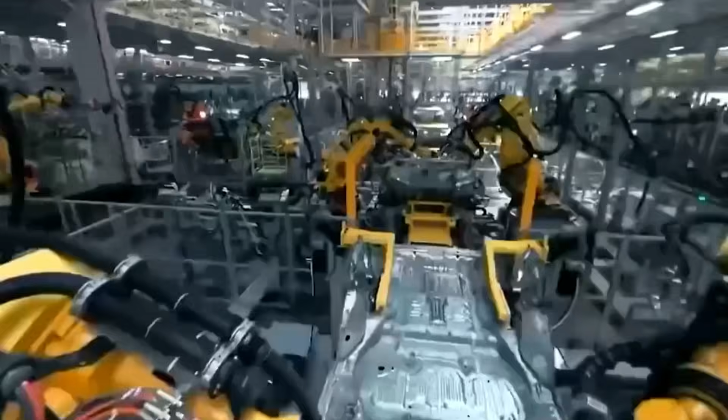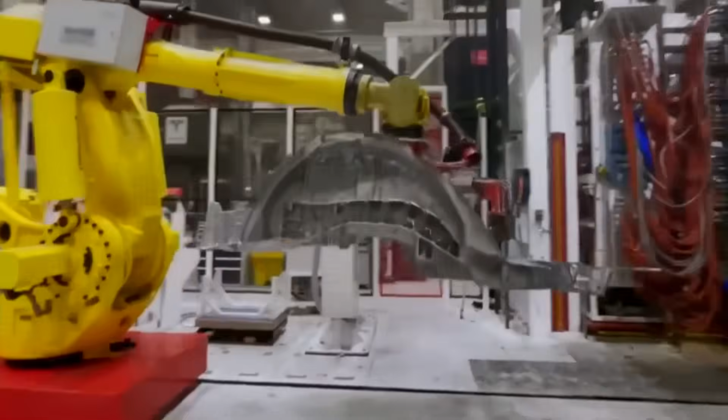When automotive engineers first heard about Tesla's plans, many of them simply dismissed them. One press instead of hundreds of welded components? Impossible. But whilst competitors were shaking their heads in skepticism, Tesla was quietly rewriting the rules of automotive manufacturing, and by the time the industry realized it, there was almost no one left to catch up with.

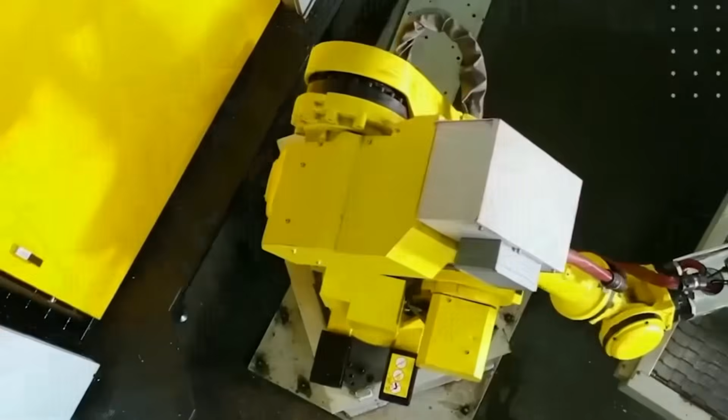And now the company is preparing to take its next step, one so radical that even those who had already accepted the Giga press as the new norm found themselves caught off guard once again. By the end of 2025, Tesla's production line in Fremont was operating with more than 1,000 robotic arms for welding, painting, and assembly. A high-tech factory in every sense of the word, or so it seemed.

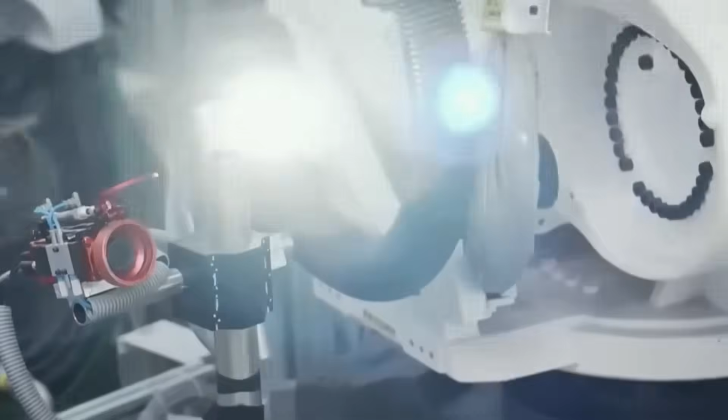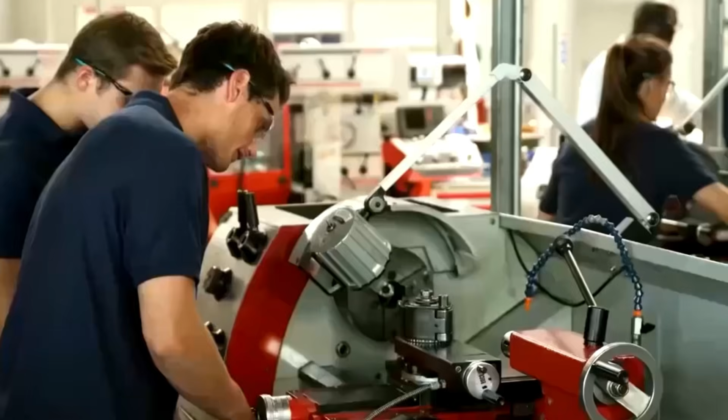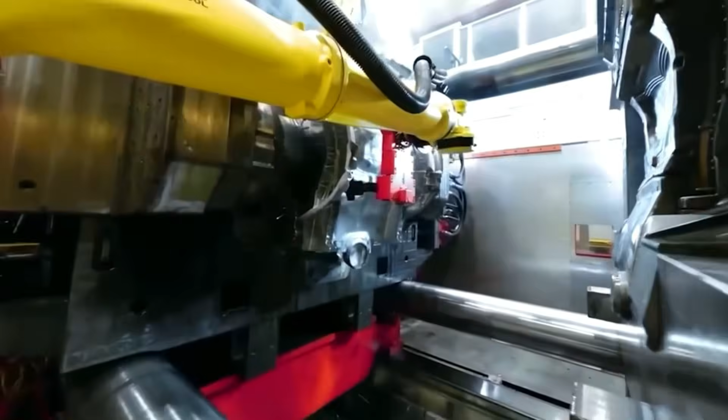But in early 2026, Tesla removed half of those robots from the line, not because production had been scaled back, but because something fundamentally different had taken their place. Elon Musk said it plainly: Tesla now has a vehicle manufacturing system unlike anything else in the world. And at the heart of that system is the fourth-generation Giga press, a machine that Musk had spent years developing specifically for new models, including the Cybercab robotaxi, a machine with the greatest casting capacity ever created, operating at a speed more reminiscent of consumer electronics assembly than a traditional automotive plant.

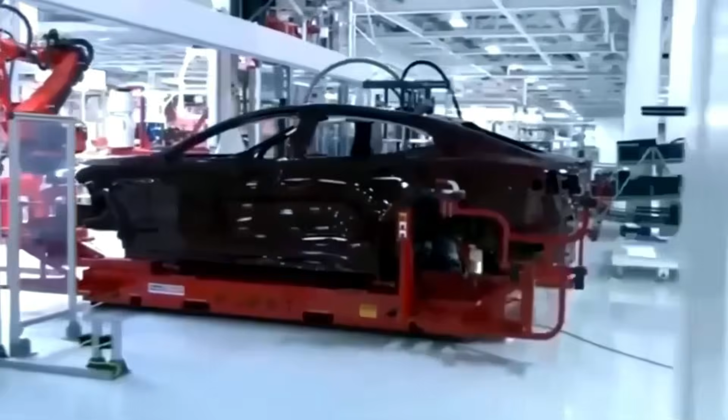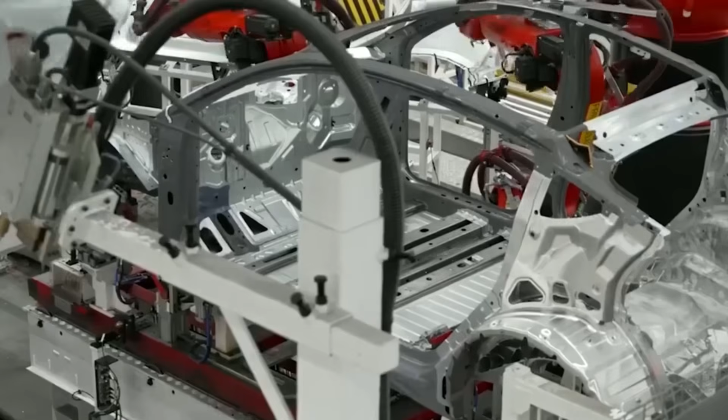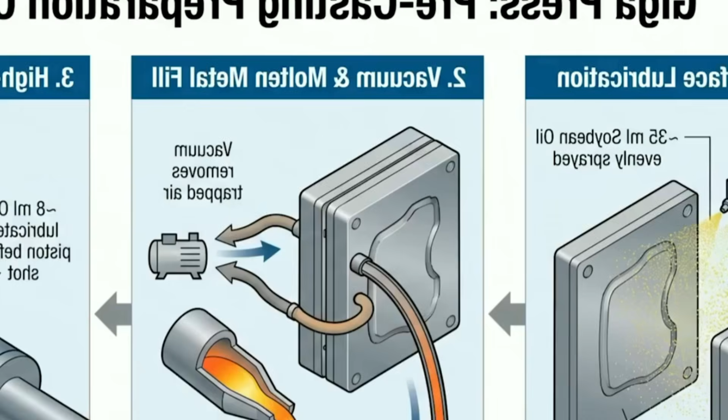But a reasonable question arises here. Why do you need an even larger press when the new vehicles are compact? What's the logic? To understand that, you need to go back to the very beginning. The story of the Giga press has its roots in the development of the Model Y. Tesla had an idea: remove hundreds of welded components and replace them with a single massive aluminum casting. The problem was that a machine capable of doing this simply didn't exist.

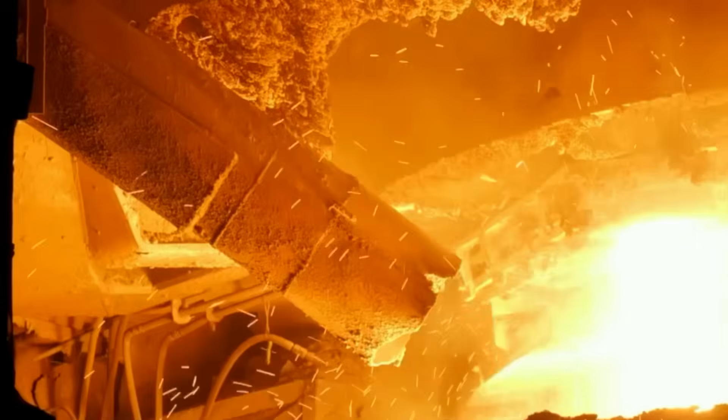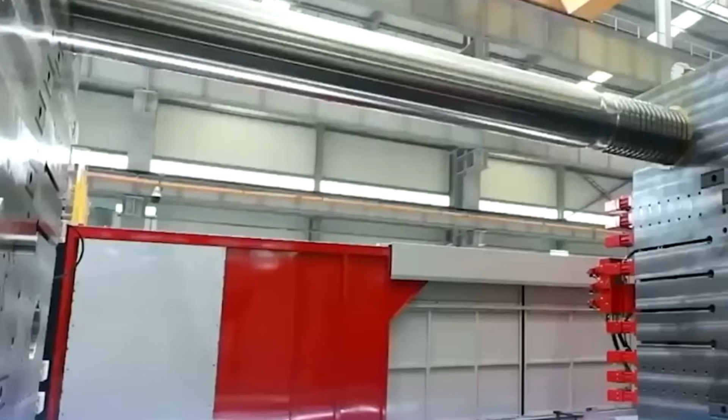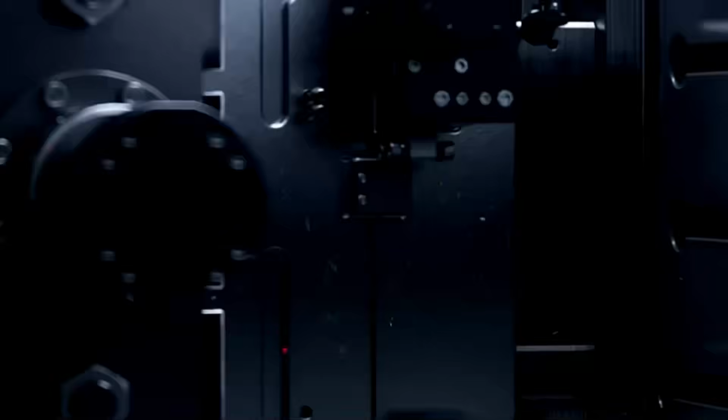Musk approached leading manufacturers of casting equipment from around the world. No one could offer what was needed. No one except an Italian manufacturer by the name of Idra, which at that moment happened to be finishing development of a giant high-pressure press. The timing of that coincidence proved decisive. And so the Giga press was born, the machine that today produces the largest structural components for models such as the Model Y and the Cybertruck.

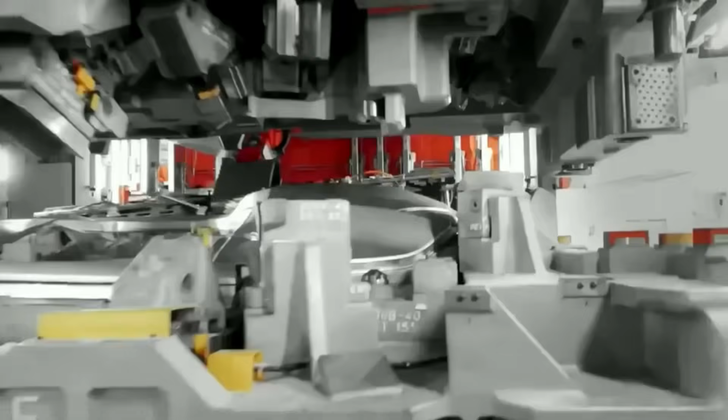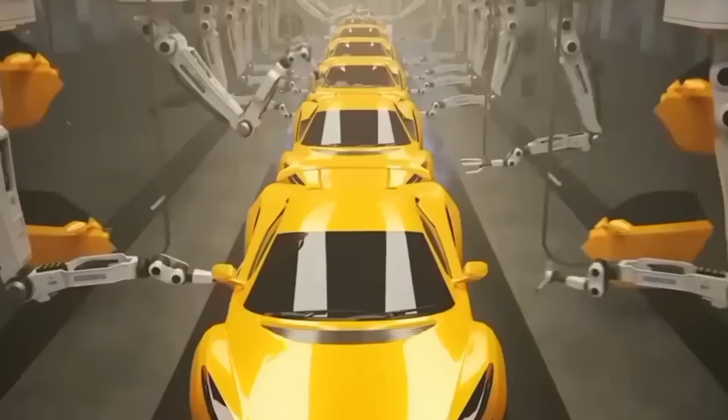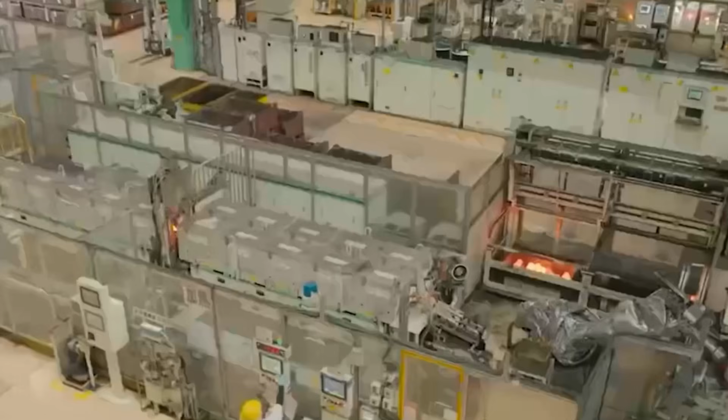The process works as follows. An aluminum alloy is melted in an enormous furnace at extremely high temperatures. The liquid metal is then injected under colossal pressure into a steel die that reproduces the exact geometry of the part. The pressure forces the molten metal into every microscopic corner of the die, eliminating voids, weak spots, and defects. Once the die is filled, cooling begins. And this is where the entire technological significance lies.

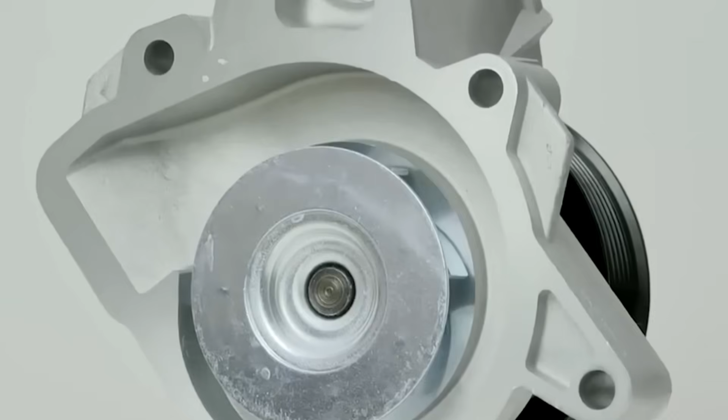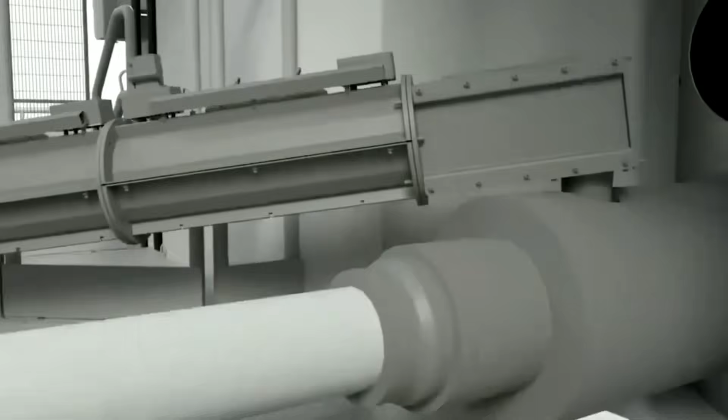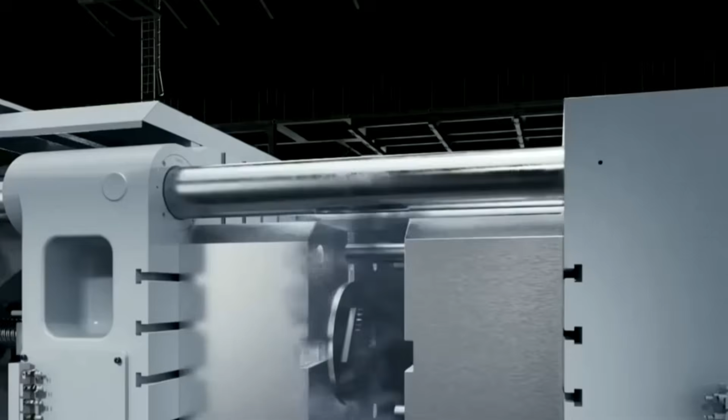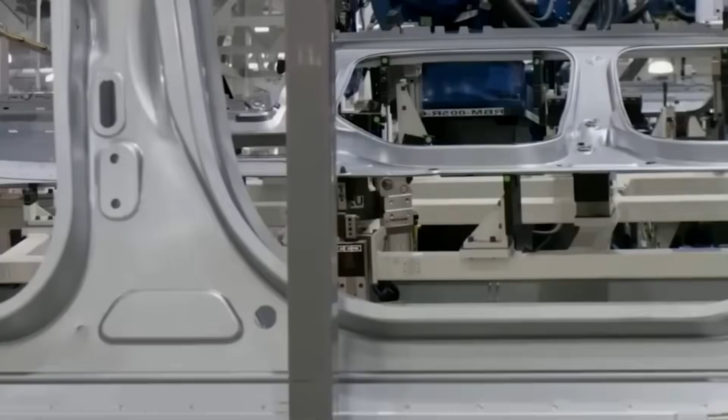If the metal is injected too quickly, air bubbles form inside and weaken the part. Too slowly, and the aluminum begins to solidify before it has fully filled the die, and the casting is scrapped. The cooling system is therefore designed to maintain a uniform temperature throughout the entire process. Once casting is complete, robotic systems extract the part, trim the excess metal, and send the component on for quality control. The result is not simply faster production. By replacing dozens of welded elements with a single casting, the Giga press makes the vehicle lighter, stronger, and more rigid, while simultaneously reducing production time, assembly complexity, and the need for manual labor.

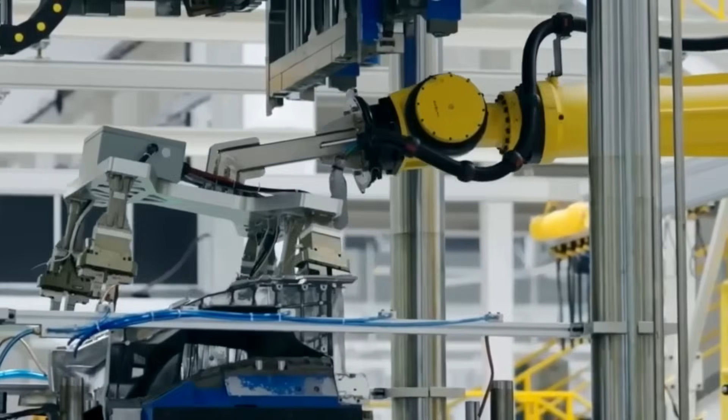Today, Giga casting is no longer exclusive to Tesla. General Motors, Hyundai, Volvo, and Chinese manufacturers are investing billions in their own casting systems. One Chinese manufacturer has already invested in a machine with a capacity of 16,000 tons. But whilst everyone else is trying to catch up with Tesla, the company is preparing to leap so far ahead that the entire industry may be forced to reconsider its very notion of what is possible. Musk's next target is a 50,000-ton Giga press.

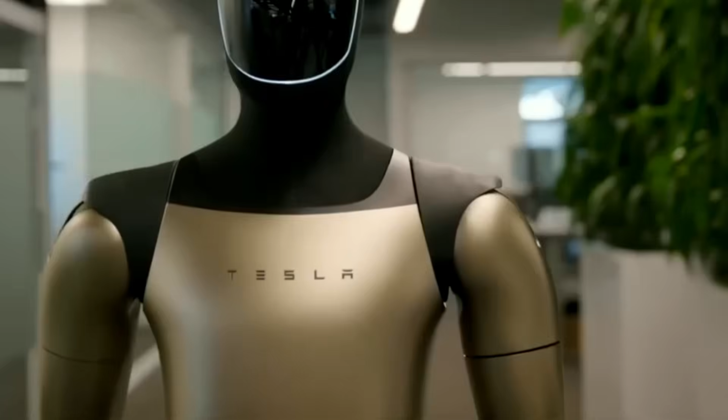When he first mentioned that figure, the initial reaction was predictable. How could a machine of that size even exist? Where would it be housed? How long would installation take? And most importantly, how can a single press simultaneously produce structural components for 5 different vehicles at once? According to Musk, that is precisely the point. Once the 50,000-ton press is up and running, the factory will move at a speed that a human being physically cannot track.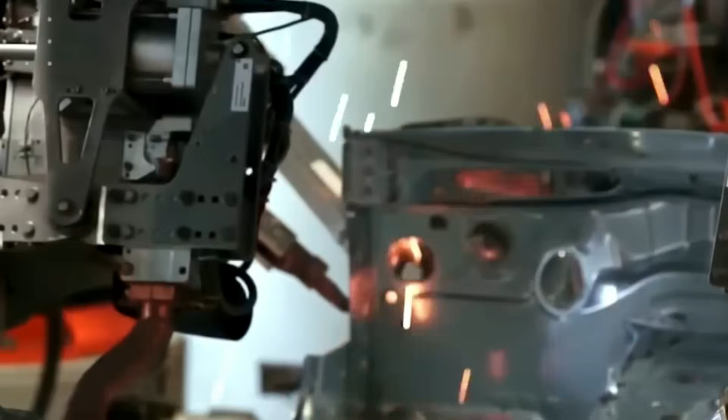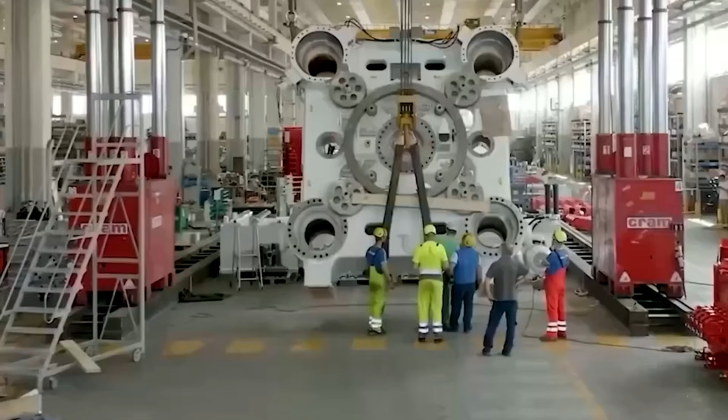Every stage, injecting the molten aluminum, cooling the die, extracting the finished casting, will be carried out in a fully automated mode without interruption. A single production cycle will take around 5 seconds. An entire vehicle frame in the time it takes you to blink a few times. Musk described it this way: the line will move so quickly that people will physically be unable to approach it. This is not a car factory in the conventional sense.

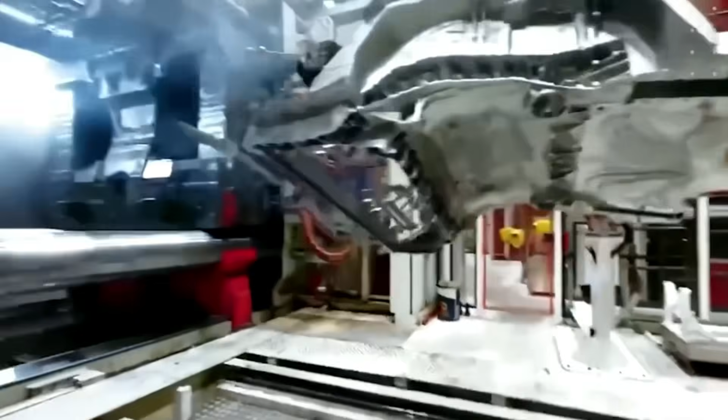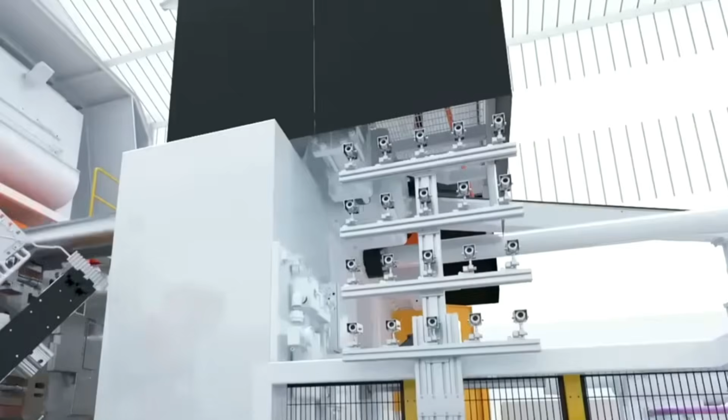This is consumer electronics manufacturing, only instead of smartphones, vehicle frames come off the line. The fundamental principle of the 50,000-ton press is similar to previous versions. The difference lies in the scale and precision of every step.

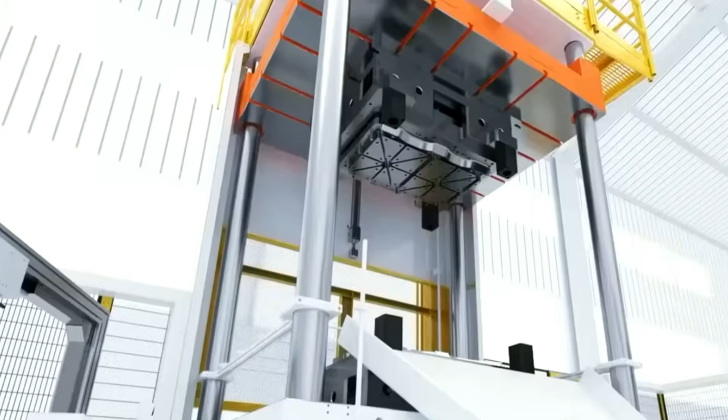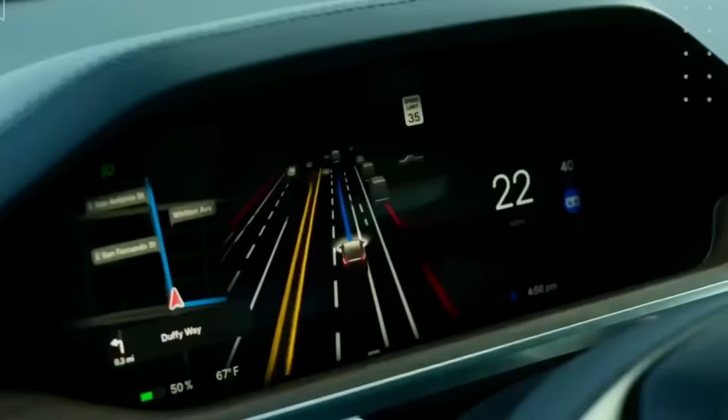Aluminium, both primary and recycled from previous castings, is loaded into the furnace and melted at approximately 850 degrees Celsius. After surface impurities have been removed, the liquid metal travels through heated pipelines to a second sealed holding furnace, where it is maintained between 750 and 850 degrees, always ready for the next cycle.

The space inside the holding furnace is filled with nitrogen. This prevents the molten aluminum from reacting with oxygen and forming unwanted oxides. For additional purification, argon, a rotary degasser, and a silicon carbide filter are used to remove dissolved gases and particles larger than 25 microns. Only after all of this is the metal considered ready.

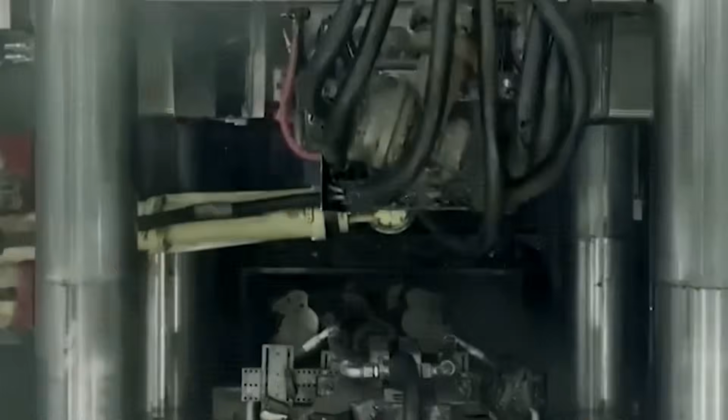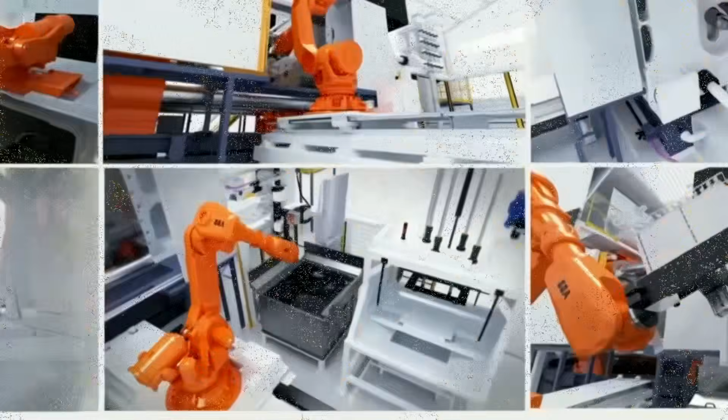Before each casting cycle, the die is coated with a thin layer of lubricant. A robotic arm applies approximately 35 milliliters of soya oil evenly across the entire surface, so that the finished part releases cleanly. A vacuum is then created to remove air, after which the molten aluminum enters the injection chamber.

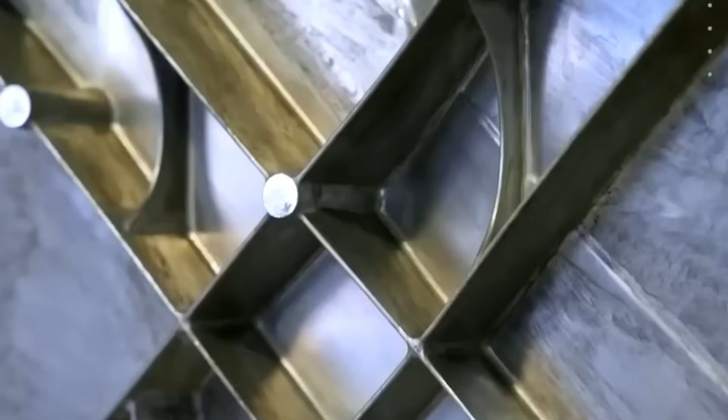A plunger, lubricated with approximately 8 milliliters of oil before each shot, drives the metal into the die cavity with enormous force. After injection, the metal solidifies inside the die, and the red-hot casting is extracted at a temperature of around 400 degrees Celsius. It is immediately submerged in a cooling bath, where the temperature drops to approximately 50 degrees.

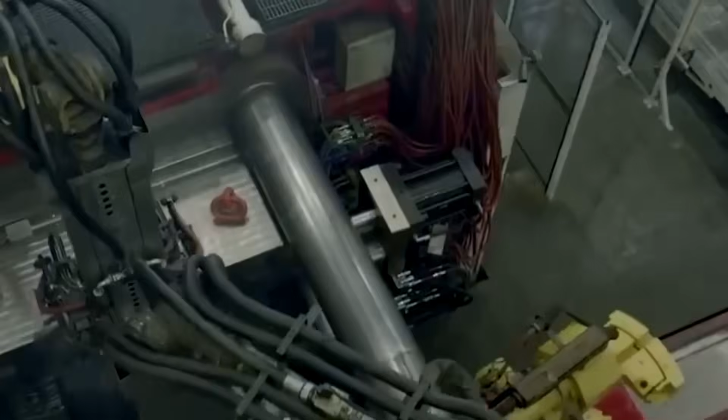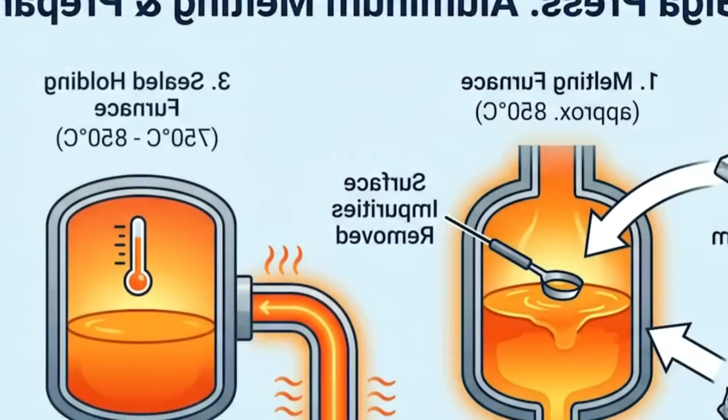This is not simply about speeding up the process. Rapid cooling eliminates a number of casting defects and improves the mechanical properties of the material. The die, meanwhile, cools to approximately 185 degrees, after which a robotic system cleans every surface. The next cycle can begin within just 1 to 2 minutes. Excess aluminum is sent back to the melting furnace. Every finished casting undergoes X-ray inspection to verify its internal structure.

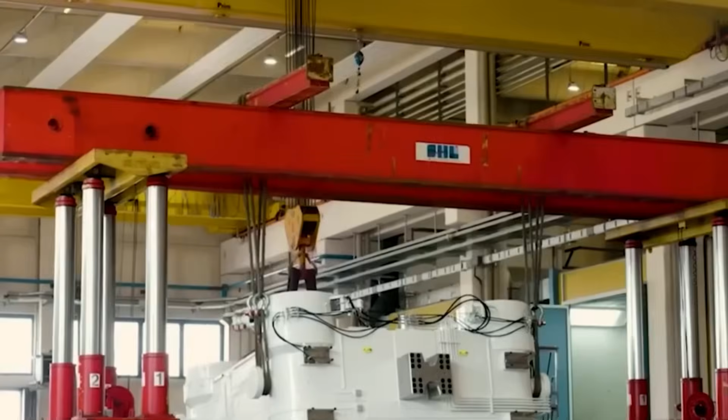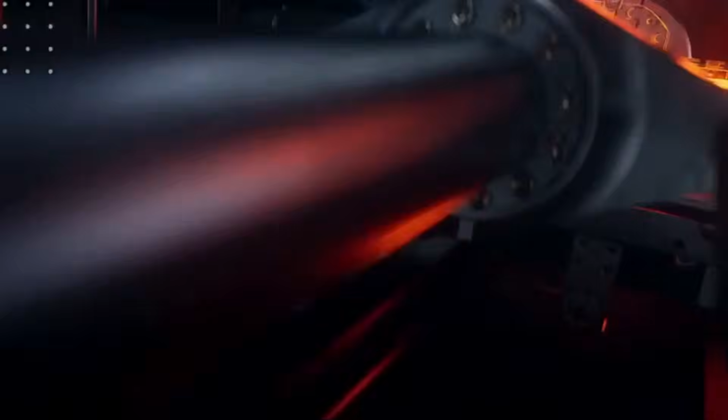Achieving this kind of speed is not simply a matter of building a larger machine. Tesla has developed an ultra-rapid cooling system, an intelligent die release mechanism, and an AI-based quality control system capable of inspecting every casting in real time. This combination of technologies has never previously existed in the automotive industry.

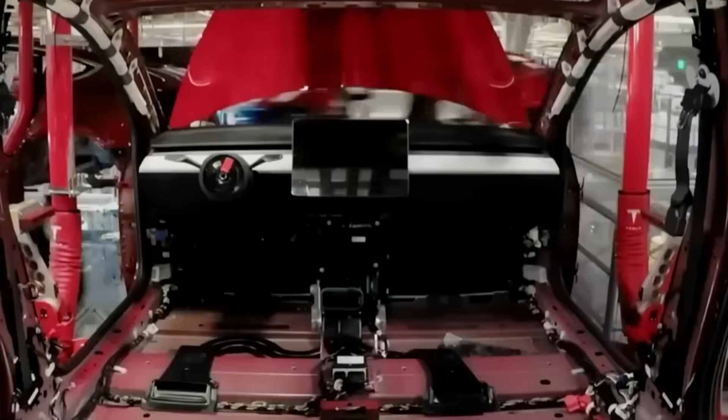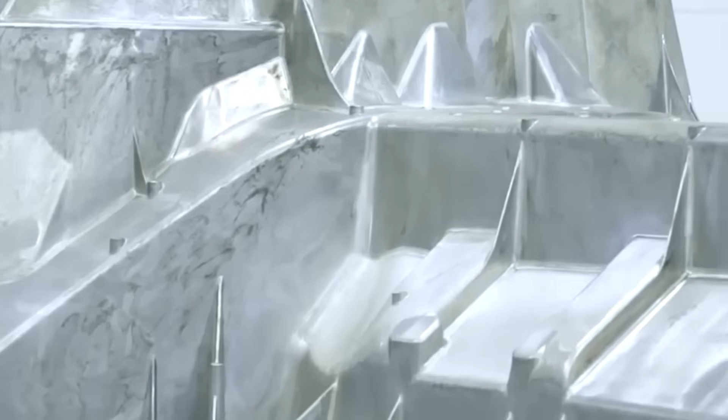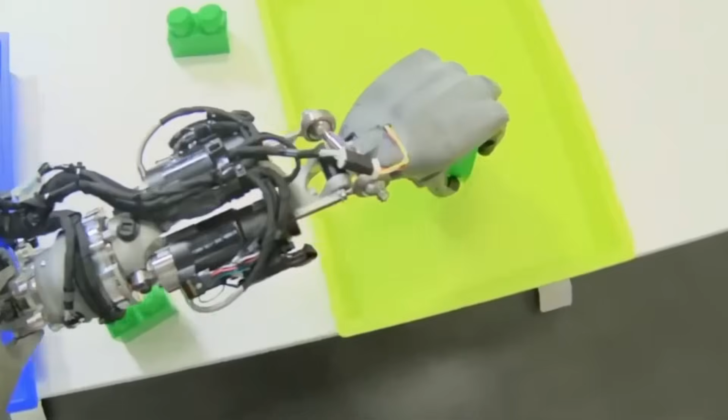A telling example: whilst the Model Y had around 200 major structural components, the Cybercab has approximately 80. This is not an evolution of manufacturing, it is a complete redesign from the ground up. For more than a century, vehicles were assembled from hundreds of individual parts joined by welds, bolts, brackets, and rivets. Each such joint is a potential point of metal fatigue or long-term wear. Tesla is moving in the opposite direction. A significant portion of the Cybercab's structure is intended to exist as a single monolithic casting.

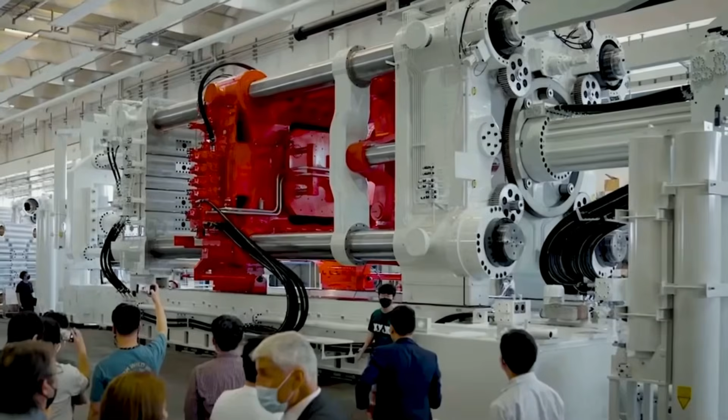The advantages extend far beyond simplified manufacturing. A more unified construction provides greater rigidity, eliminates numerous potential failure points, and allows the chassis to behave as a single continuous element rather than a collection of joined parts. This delivers real-world benefits, from improved ride comfort and handling to more predictable energy absorption in a collision. And in a future where vehicles must drive themselves, this kind of structural uniformity could prove to be one of the key engineering advantages.

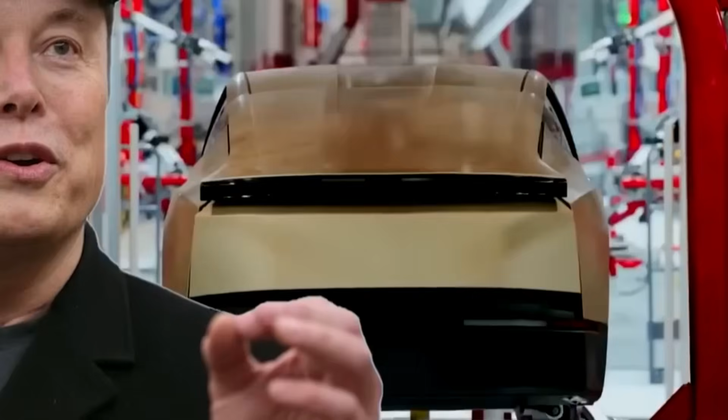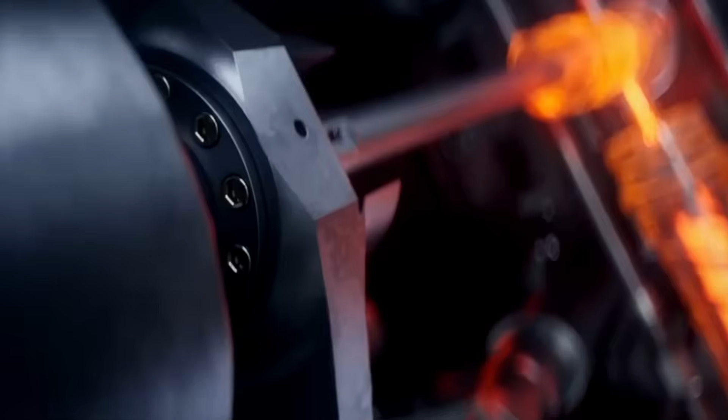But Tesla is not stopping at the Giga press. The next bottleneck the company has set its sights on is the paint shop. Painting a vehicle is one of the most expensive, energy-intensive, and time-consuming stages of production. Rather than speeding it up, Tesla appears to be asking a far more radical question. What if the paint shop isn't needed at all?

According to Tesla's patents, the body panels of the Cybercab may be produced with color built directly into the material during the forming process. The color would appear at the moment the panel is created, with no separate painting stages required. It is worth noting that the latest production versions of the Cybercab appear noticeably glossier than the early matte prototypes, hinting that the idea is moving towards realization.

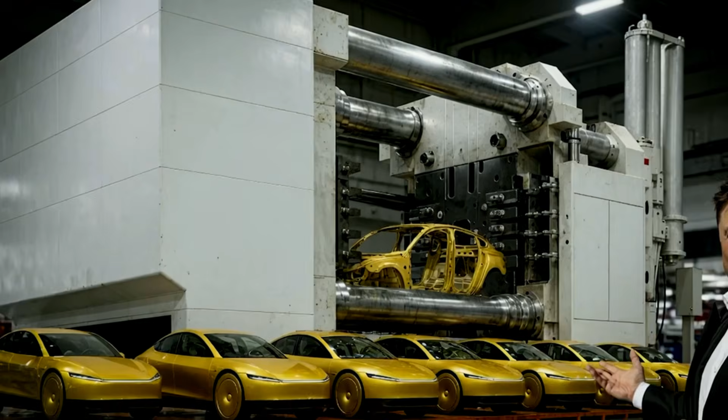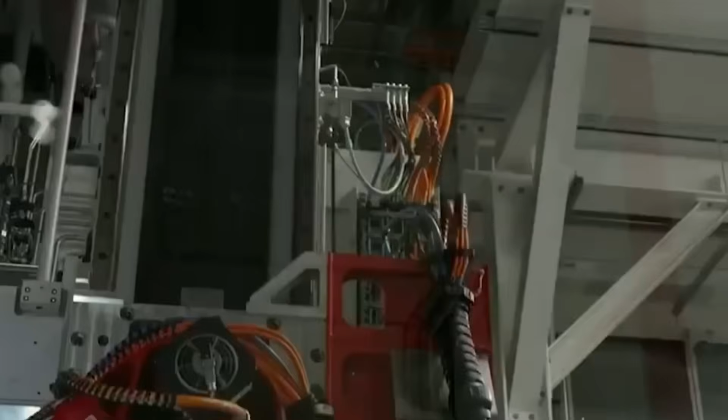If this comes to pass, the implications will be enormous. Paint shops occupy vast amounts of floor space, consume enormous quantities of energy, and add cost and complexity to every vehicle produced. Eliminating that entire stage means not just saving time, but fundamentally simplifying production and reducing the cost of the factory itself. Everything described in this video is not science fiction, nor is it some distant future.